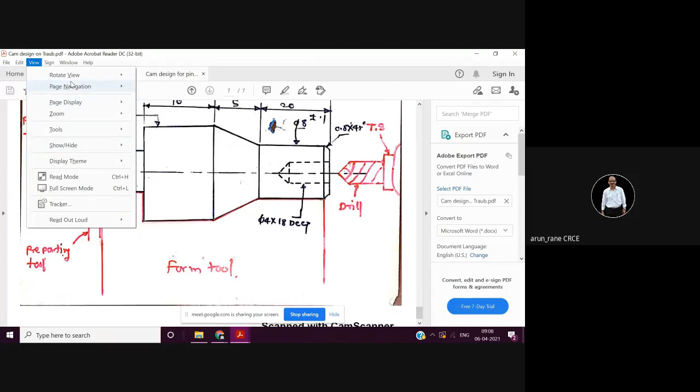So, yesterday we were discussing about CAM. Yesterday I also showed you a few components which can be done on a Traub single spindle automat.

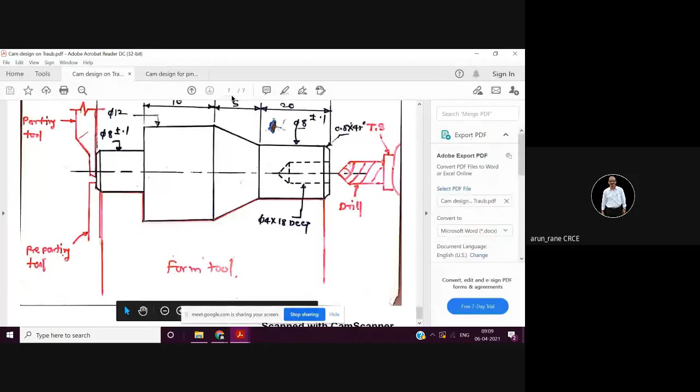So this was a slightly difficult component, but it can be made easy by using this form tool. Yesterday I was telling that every time you cannot go for the form tool because there is a restriction on the length of the form tool, because if the length of the form tool increases, then the cutting load will also increase.

And every time you cannot use the form tool because the single spindle automat is meant for mass production, so you cannot keep on grinding the tool every 5 pieces because then the downtime will increase. So this particular profile form tool - only one form tool is used, and obviously this is your front cross slide.

This is your front vertical slide, this is your rear vertical slide, and this is tailstock. So that means you have one more slide free, that is rear cross slide, which is not used. So that could have been used for roughing, that is, you use two form tools - one for roughing and another for finishing, so that you get good life of the tool. This is actually advisable.

Now, in this case, why has only one form tool been used? Because in this case, see, the diameter is 12. So this diameter 12 you will obtain from the round bar itself. You don't have to do any operation here, because your raw material is in the bright condition. So that means what you have to do is only this taper and this turning.

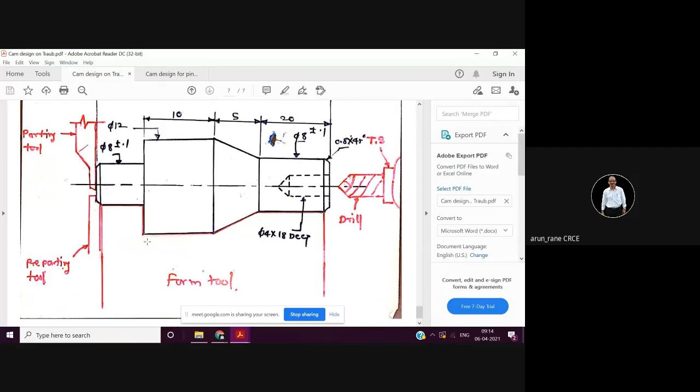Not exactly in line with this, say 1 or 2 mm before this, and extend this line. Wherever you are doing this taper etc., you should not design the taper exactly as per this length, that is exactly of 5 mm length. So you should extend both the sides, that is this as well as this. But now here you cannot extend, isn't it? So here you have to obviously go like this. But here you can definitely extend and then make it straight and horizontal. So this is how you have to go.

So I have shown many components. So this is one. So once your tool layout is done, then cam design is not difficult. This is two. This is three.

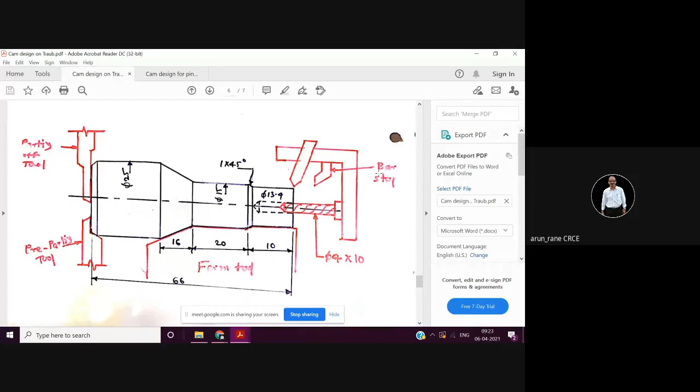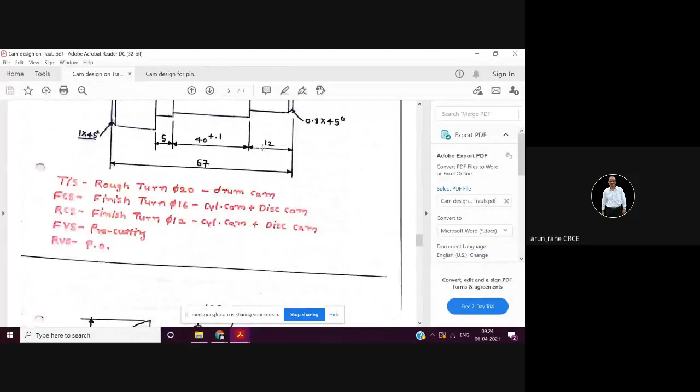Now, how to overlap the operation? That I will tell one by one, and then we can go for the cam design, actual cam. The skill of the cam designer in Traub is to minimize the time, and that is what is seen by the examiner. That how you are going to process the component.

Now, by default, you have to start this pre-cutting along with this, no problem, but you have to ensure that you keep diameter 6 here by the time all the operations are finished. That means till all operations are finished, this tool will reach to dia 6, and then only parting off will start. Parting off, or pre-parting off, you can fix either here or here. No hard and fast rule.

So what we do now here: the swing stop process is first. First the stop will come in every operation. Then you will start with the longitudinal turning, and you have to also start with pre-cutting. Then once this horizontal turning is done, then you can start with this thread cutting. So you have to ensure that the moment the thread cutting is finished, this tool has come till diameter 6, and then it is retracted.

You have to also ensure that this parting off starts after this has started, maybe 1 or 2 mm in, this tool is started, and you have to ensure that by this time all the operations are done. This tool has also reached diameter 6, and then it will start parting off. That means while all the operations are being done, you have to ensure there is diameter 6, because if this diameter is reduced here, it will cause vibration.

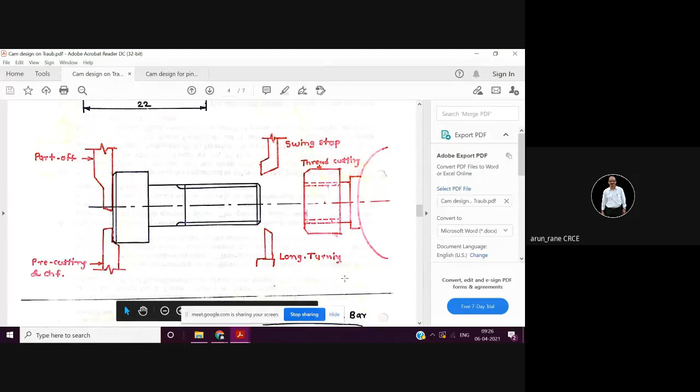Sometimes I have seen in cam designs that students have started this pre-parting, and by the time this is completed, the pre-parting is also done. That means the component is already parted. So how are you going to do these operations? It is not possible.

Second, here also same: swing stop, then start with longitudinal turning, then after some time start this, also start this thread cutting. Then once this is over, then you start with the parting off.

Now you have to see that this chamfer, on the bolt, is produced by this tool while pre-parting is going on. At the same time, this chamfer will be done on the next job, that is the subsequent job, because of this.

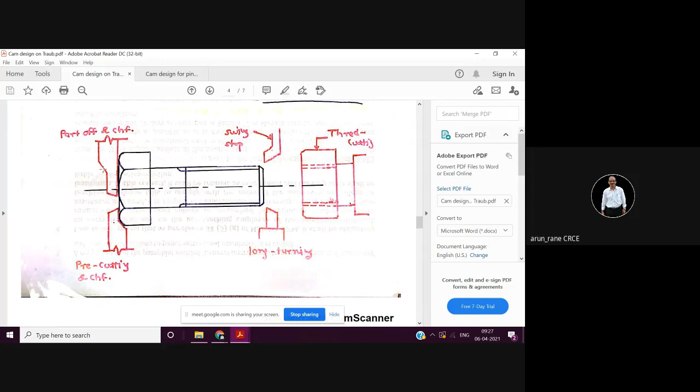So here you have a turning attachment fixed from the tailstock. So we will do first rough turning diameter 20, 5mm from one side. Then the moment the turning is started, rough turning, after some time we don't have to wait here. We don't have to wait for all rough turning to be done at this point before starting finishing turning.

The moment the rough turning is started, after say 2mm or 5mm the tool has gone for rough turning, you can start with the finish turning, because this is from the tailstock and this is from the front cross slide. Now this rough turning tool has gone 10mm, then we start with finish turning diameter 16. Again, once it has gone 5mm, you can start with finish turning diameter 12. So that means this is what is called overlapping.

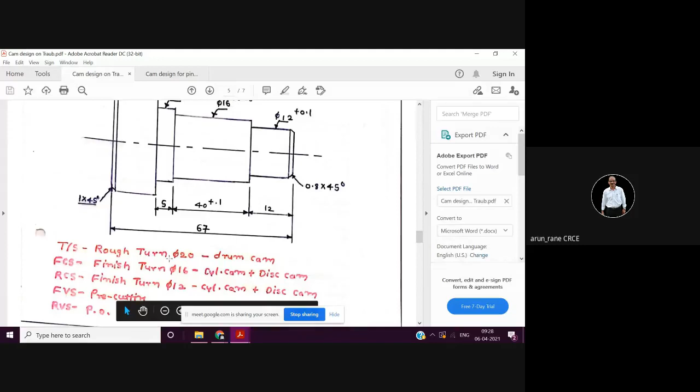You are not waiting for this operation to get completed, then start this, wait for this operation to get completed, and then start with this. No, let this go after turning this 10 mm. You start with this, and after going for 10 mm or 5 mm, you can start with this. Like that you have to do.

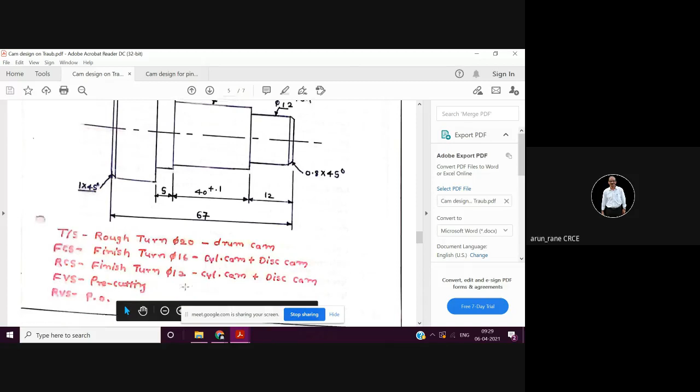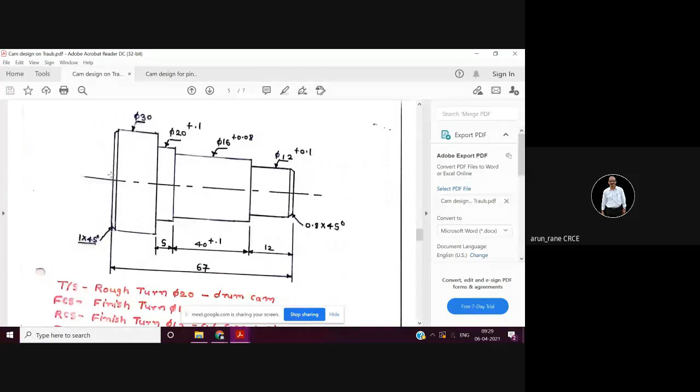At the same time, you can start with the pre-cutting. The moment all these operations are done, you have to ensure that pre-cutting and parting off tool have reached 6 mm. So parting off will start once all these operations are done, but by that time, you have to see that the parting off tool has come till 6 mm dia.

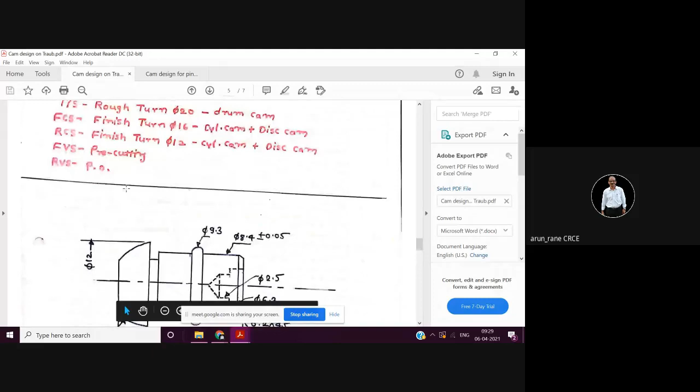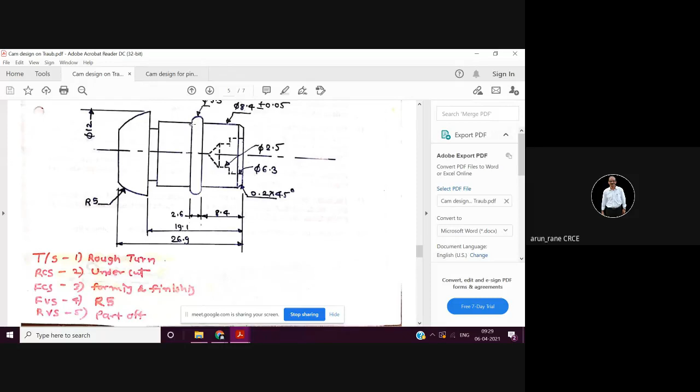Same thing here, rough turn. You are doing rough turning from the tailstock. Now here you cannot start the undercut, unless and until this rough turning is done. You cannot start this undercut, or even this forming, unless and until rough turning is done. Understand? Because this is diameter 12 and this is diameter 9.3, so here you cannot overlap the operations. First you have to complete the rough turning from the tailstock.

So the rough turning is completed, diameter 9.3, then the tailstock is withdrawn. Then you start with the undercut, and forming and finishing. Now this undercut and this forming can be done simultaneously, because these are two separate operations, isn't it?

So one can be done from the front cross slide, another can be done from the rear cross slide with this tool. Or even you can design one tool which can do this undercut as well as this forming together, and that can be done either from the front cross slide or from the rear cross slide.

You can also do it this way. Either you can have two tools, one operating from the front cross slide and another from the rear cross slide, or you can do it with one tool only.

But I prefer using two tools instead of one, because then the maintenance, regrinding, and setting up becomes difficult in combination tools. If you use a combination tool like this, the design becomes complicated, and regrinding requires maintaining this distance and that distance properly in a combined tool.

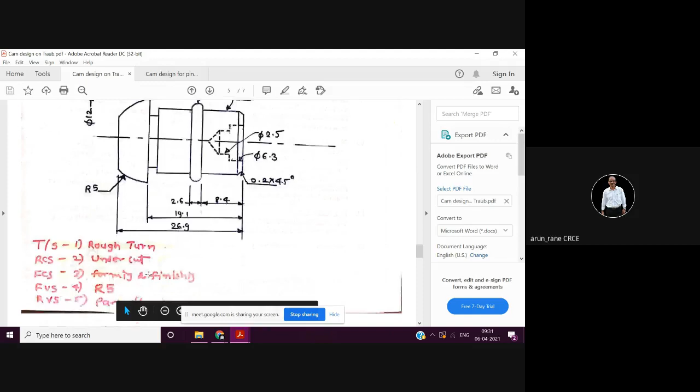Then once this is done, or while this undercut is going on, you can start with the pre-parting operation. Pre-parting operation will have this radius also, and then parting off, right? But here there will not be any pre-parting because this radius itself is 5 mm, isn't it?

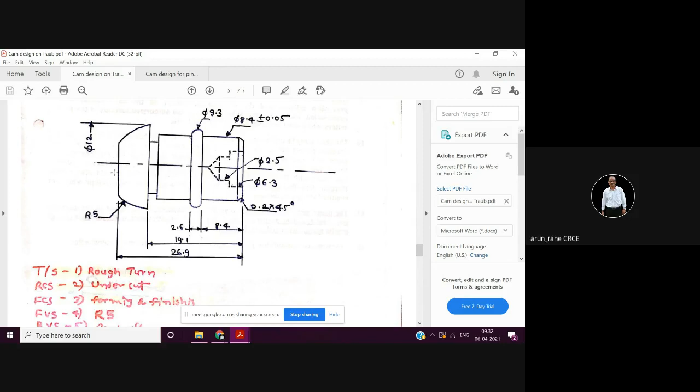So you can just do this radius forming from the vertical slide, front vertical slide. And the moment this is completed, then you can start with the rear vertical slide. This is the most simplest.

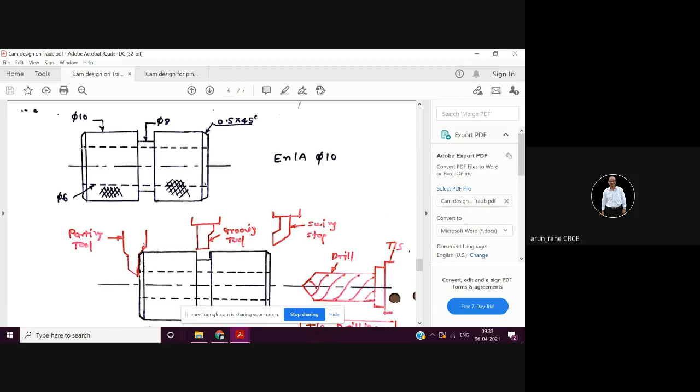At the same time, you can start with pre-parting, but here pre-parting is not required. Why? Because there is not much material to cut. This diameter is 10, then the inside may have 6 mm, so that means already this material is only 2 mm. So for 2 mm, it is not advisable to go for pre-parting and parting.

So you can only use one tool. That one tool will do chamfering here on the job which is being done, and it will also do chamfer on the subsequent job from this side.

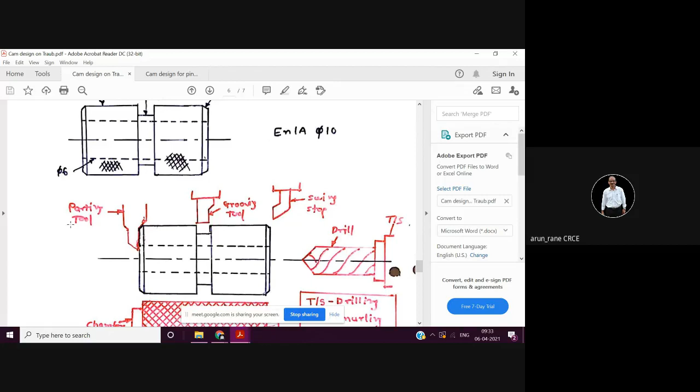And second thing is, if you try to use the pre-parting tool here, there will be interference between this knurling tool, this edge, and the pre-parting tool. So it is not advisable to use the pre-parting tool over here.

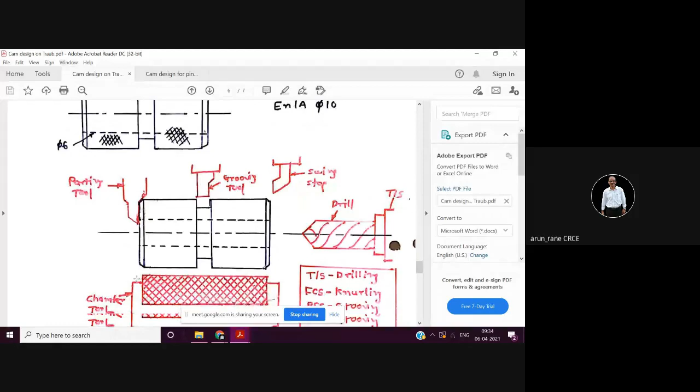And this we have discussed. So these many components are enough.

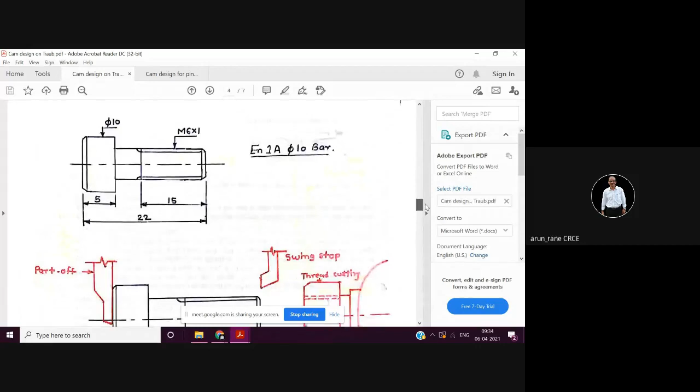I already uploaded this. This is one, then this is two, then this is three, then this is four, then this is five, then this is six, then seven, then eight. Eight components, all university components, right?

Now let us start with the cam design. This is a component, and the principle remains same. So if you understand this component well, then you can do any component.

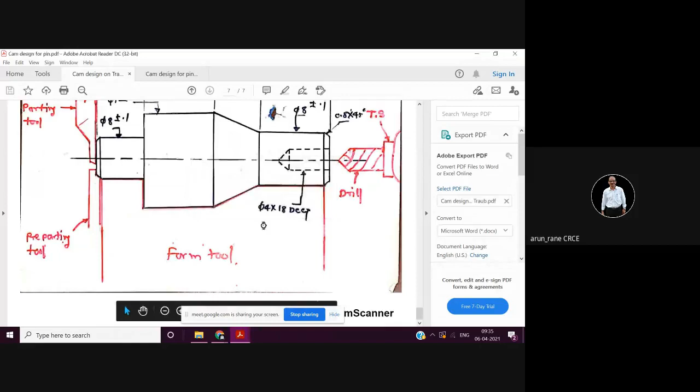So try to understand the component. Try to understand the component. This is a component, this is a tool layout. This is how you have to solve this.

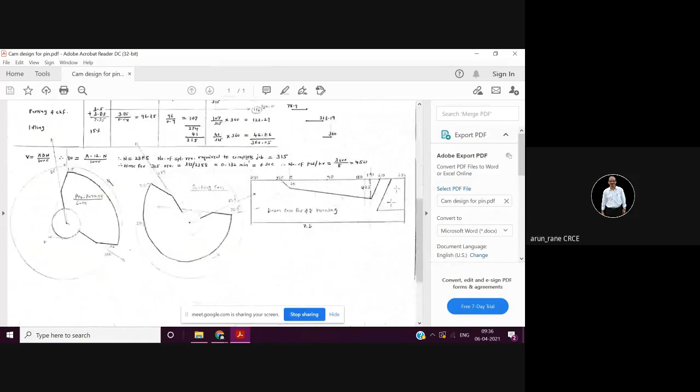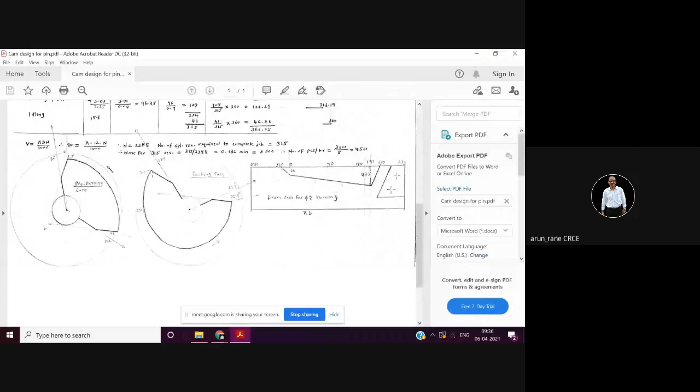For this entire thing is 20 marks, out of which 3 to 4 marks will be reserved for this tool layout, depending upon the complexity. Then for these drawings, it is 1 to 1.5 marks per cam, depending upon the complexity, and then remaining marks for this calculation. So that is the distribution of the marks. So just have a look on this tool layout and check whether you can understand.

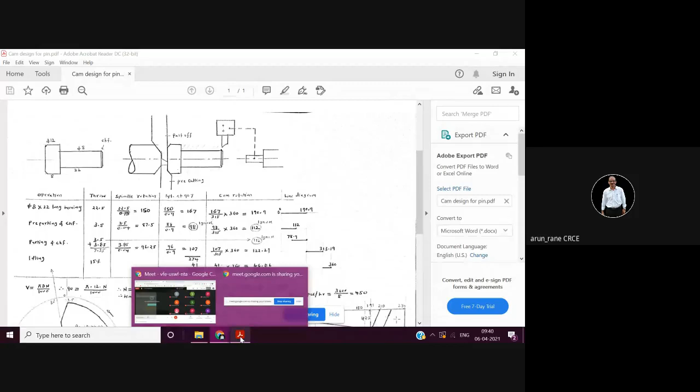This is diameter 12 and you have a chamfer to be done here. Then the length of this is 8 mm. Then this diameter is 8 and you have a chamfer here, that means you have two chamfers to be done, one here and another here. And length of this is 22. So the total length of the workpiece will be 30.

Obviously, the raw material diameter will be diameter 12 bright bar, diameter 12 bright bar. So this diameter 12 you don't have to turn.

So what will be the tool layout? So you have to do only this turning, and we know front cross slide and rear cross slide can move only in this direction, and it can move in this direction but with longitudinal turning attachment. So as far as possible, you try to avoid the longitudinal turning attachment. Because if you are using longitudinal turning attachment, then you have to use two cams: one disc cam for positioning cross slide radially, and another drum cam for moving the cross slide in longitudinal direction.

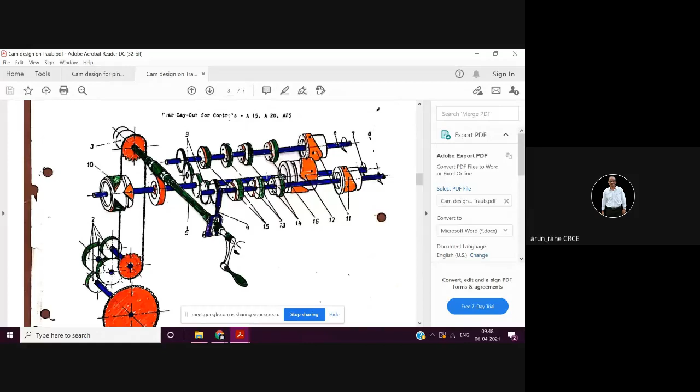So the principle is that this will rotate through only one revolution, or 360 degrees. By the time it rotates through 360 degrees, all the operations have to be completed. So by the time this cylindrical cam rotates to 360 degrees, all the operations have to be completed. This is the principle in cam design - you have to understand this very well.

So the line diagram corresponds to that cylindrical cam, like this, starting at 0 degree. So now this longitudinal turning is started from here, from 0 degree to 190.9.

That means the drum cam has rotated through 191 degrees. I will tell you how those calculations work. But now you understand that here is where the tool is going.

So during this period, this tool receives motion from the tailstock, and the tailstock receives motion from the drum cam. So by the time this tool moves from here to here, the drum cam has rotated from 0 degree to 191 degree.

So at 0 degree, when this starts, the drum cam starts rotating. At the same time, that is at 0 degree only, that is the reference degree, you are starting the pre-cutting operation. Now, how much will the pre-cut tool penetrate inside?